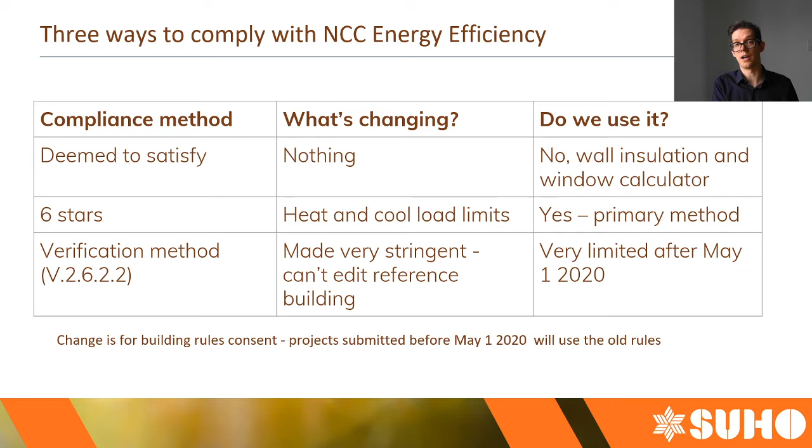Why is that so? Because the 6-star rating basically asks you to upgrade your design to get to a certain level, 6 stars. The verification method allows us to make a reference building, and we essentially try to make that reference building perform as bad as possible, because we have a lot of flexibility to change the window sizes and all that, so that our actual building has to simply be better than that reference building in order to comply. What does that actually mean? Well, in reality, it means that you can currently get houses that are otherwise 2 or 3 stars still through compliance with relative ease using that verification method, because of that flexibility in changing the reference building.

Is that a good thing? Probably not. So the government introduced this loophole to the 6 stars, and essentially a lot of the industry has become addicted to that loophole, and will have big troubles now that the loophole is essentially being filled up again and taken out. It's still there, but we can no longer actually change the reference building. So that reference building is set and has certain values and certain features to it, such as a 2.4 meter high ceiling. If the home you're building or have designed has higher ceilings than that, you're already getting into trouble straight away.

So essentially where you were kind of comparing apples to apples in the verification method, now you might have a pineapple that you have to compare to an apple, which is going to be pretty much impossible practically, or the specifications that you need to be better than your reference building are going to be so high that it's simply impossible to use.

So in practice, that means that come May 1, 2020, all of the houses are going to be using that 6 stars method. Now, people in Victoria and New South Wales will be very used to that 6-star system. That's where they have been using it predominantly in Australia. But now that's going to be a pretty level playing field across the country. Everybody's going to go to 6 stars, except for Queensland and the Northern Territory. So Queensland is still staying with the old code, 2009, I believe, at this moment.

However, even for those markets that are already used to the 6-star rating system, such as Victoria and New South Wales, there is a little extra criteria that has been introduced, which are the heating and cooling loads. So in addition to the 6 stars, you now need to meet a certain limit of heating and cooling load, a bandwidth, essentially. And what that means is, you probably need to know what a 6-star means. A 6-star essentially means nothing else but the combined sum of the heating and the cooling load together. So megajoules per square meter per annum. So that combined gives you a certain number, and that gives you a certain star rating.

What that meant is that you could potentially have homes that were very heating or very cooling dominant, and still together summed up to be a 6-star home. That's what the government wants to avoid, because we're trying to reduce the amount of mechanical heating and cooling that we need to pump into the houses. So depending on your climate zone, there's going to be different heating and cooling load limits, and as you can see on the screen, those can be quite different for different climate zones.

There's about 8 standard sort of climate zones that a lot of people know about in Australia. Victoria being predominantly 6, Adelaide being 5, and the hills in Adelaide being 6. But in NatHERS, the software that we use, those have been further narrowed down into over 65 different little climate zones, and every single one of those has their own heating and cooling load limits that we have to check in on. So good to know.

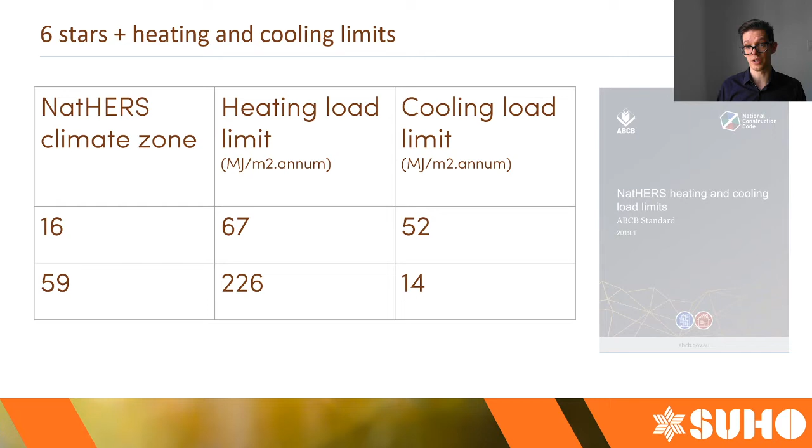So then when you need to get that 1 point or 2 point of stars, you still have to get quite creative in terms of upgrades in order to get there. So that's obviously something that we're trying to avoid. And the way we're trying to avoid it is by giving you guys some tips and tricks on what are the things that you need to be mindful of.

Now, don't take this the wrong way, but essentially what we're trying to do is beat a piece of software. Now, that software is a good software. It's pretty accurate in its simulations, but at the same time, the software obviously cannot cover every single type of design. It's going to have its flaws. It's going to have certain things that make sense. It's going to have things that don't make sense. So if we know what the software likes and doesn't like, we can prepare for that, and we can manage the expectations of our clients in the process.

We're just telling you, okay, if that's the case, then you need to tell your client you're probably going to have to offset somewhere else, meaning probably higher specifications in your glazing and your walls if you want to have that. So anyone can have anything they like if they're willing to make sure that they have the right specifications to do so. So a few other tips that the software likes: separating the habitable and non-habitable spaces with doors always works well. The eave depth and shading devices have a big impact, especially external shading.

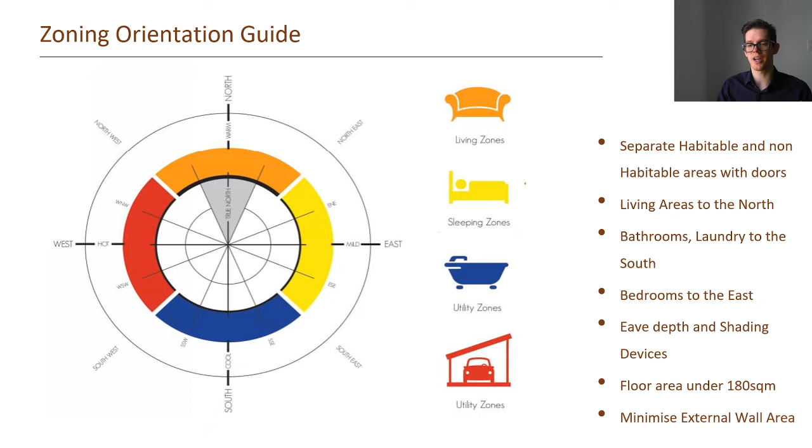Also, minimizing the external wall area. It's another good example. And when I say minimize external wall area, I'm talking about those walls that go with all the little nooks and all the crannies. The more we do that, the software just doesn't like it. So we're trying to minimize that external wall area by keeping it as straightforward as possible. Again, it might not always be possible, but where you can, try to keep these things that we've got on the screen in mind.

An example. Always like to bring in examples because it makes it a little bit tangible for everyone that's watching. So this is a multi-story, decent sized home. It's a new build and it's 3 stories. Now, the 2 things I would like to do with this example is not only to give you an idea about how this is sitting under the old code and the new code, but also to give you a glimpse into SUHO's reality. What happens when you send us through a plan? We actually take the plan and we model up the floor plan straight into a piece of software called First Rate 5.

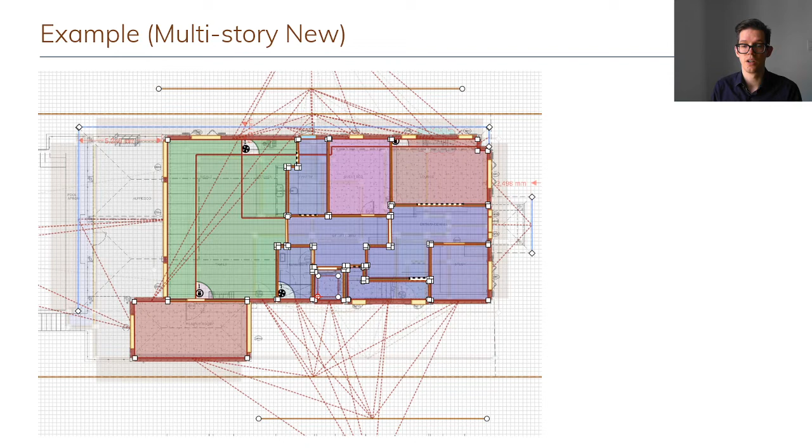And all the different areas in the house get a different label attached to them to determine the type of activity in that room, when people typically occupy it, and what type of activities they do. So gray, for instance, would be an uninhabitable space. That's the garage in here. Green might be your living and kitchen area, and you've got your bedrooms and so forth. So everything gets their own little label attached to it. And what label something has is important.

So that's also something that you need to be mindful of when you design something: what are the type of labels that you use, and are all the rooms that I have in mind already set after the build is completed? Might there still be some flexibility in terms of what you're going to do in that room? If you're not entirely sure, you might just want to stay away from already putting a name to it, because that might affect you negatively.

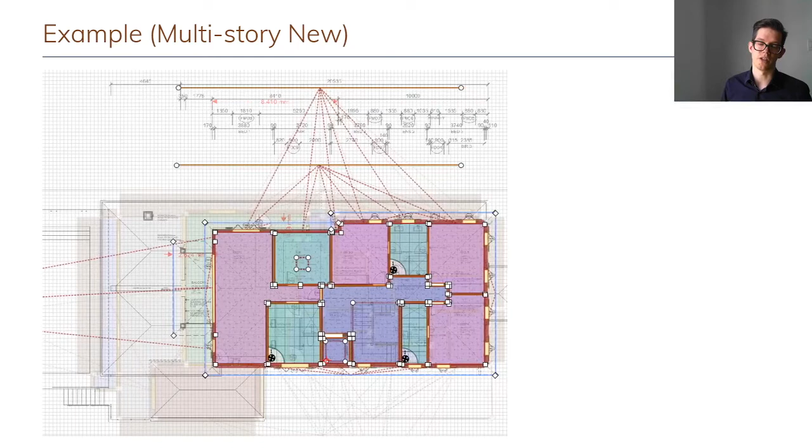Another thing that you need to keep in mind, in this particular design, it's a 3-story design. That means that we need to model every single house around it standard as 3 stories as well. That's mandatory, unless we get details from the architects, or we can find out on Google Maps that the neighboring houses are maybe double story or even single story. That's obviously going to affect how much shading we're getting from the surrounding houses. So the more details we can get, the better. So make sure that you provide as many details on your plans in terms of the surrounding houses as well.

Also let us know the manufacturers of the windows that you're looking to use. If you have it, we can already model that. If you know exactly what type of flooring you're going to use in the different rooms, let us know. Why? If you don't know, you can safely assume we need to consider worst case scenario, whereas maybe you don't need to if we knew that kind of detail. Under the NCC19, it's important to give the ESD consultants a lot more detail at the very early stage, as much as possible, so we can make the compliance model as accurate as possible to what actually is going to happen.

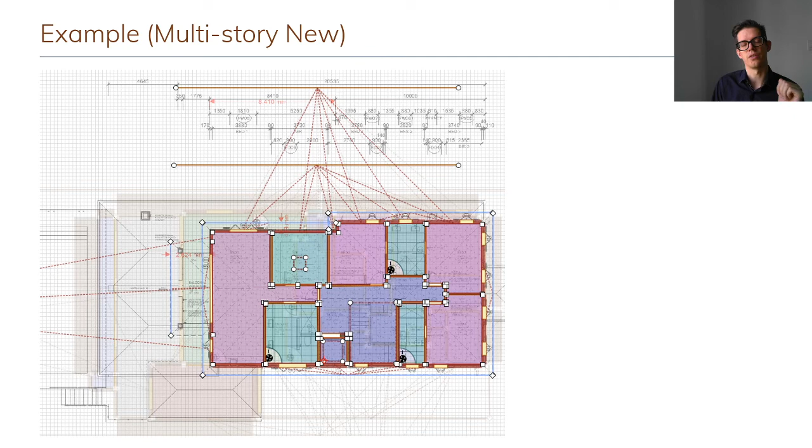Now, this design that you're looking at right now comfortably passed compliance, using the verification method that I spoke about before. So we didn't have to upgrade much on the specification that the client and the architect wanted to use. Everything was just fine. Now, what did we do? We modeled this under the NCC19 regulation. The initial star rating on it was just 2.7 stars. So bear with me, we're not even halfway to where we need to be. And our consultants then went into the design and started changing a lot of things about it, as you can see in all these bullet points. So we changed the glazing to really, really good double glazing.

We even changed the size of the windows, which people are not happy with usually. Bulk insulation to the internal walls. So really significant changes to the actual original design. And even with all that, we only managed to get it to 4.9 stars. So still a full star off the actual required 6 stars. Not to mention the heating and cooling load. I've not even taken that into consideration.

So obviously we don't want to scare anyone, but we definitely want to also make sure that everybody understands that, especially for larger designs, you cannot wait for building permit to go to your ESD consultant. It simply is not going to fly. There's risk of us having to go back to you, like with this design, we would have to go back to the client and say we need to change the design.

And what we really want to try and avoid for you guys is you making a design, showing it to the client, the client falls in love with the design, shows it off to all their family and friends, although that might have to happen digitally nowadays. That used to be the barbecue back then. But you know what I mean. They get excited about it. They love it. If you have to come back a few months later and say, listen, sorry, I can't get this through energy compliance, there's no way unless we use triple glazing, so we need to change the design. A surprised client is usually an unhappy client.

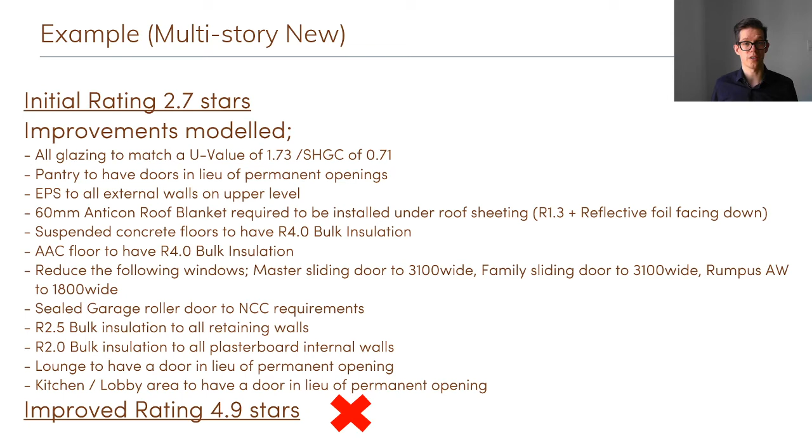But I know you get the idea from this example. What used to pass quite comfortably before might not pass that comfortably anymore. Anything that used single glazing before, you can safely assume you're not going to be able to get away with that moving forward. So here's a little summary of the standard design advice that we give people, just because, again, we want to make sure you understand what the software favors. You can deviate from that any way you like, but if you do, just make sure that you understand that there's some consequences to that.

So living areas to the north, that is always a big benefit. If you can manage that, that would be great. Obviously, 20 to 30% glaze to floor ratio would be ideal. That's what the software likes. So having floor to ceiling windows all around, it's going to be probably pretty tough to get that through compliance unless you're really using exceptionally good window specifications, which equals a lot of money.

Just basically try to keep these kind of tips in mind when you're designing. I've not put these tips in so I can run through all of them, because you guys can read perfectly fine. Just know that you can always rewatch this webinar on our YouTube if you want to comfortably run through some of the slides and read some of the things that are on it.

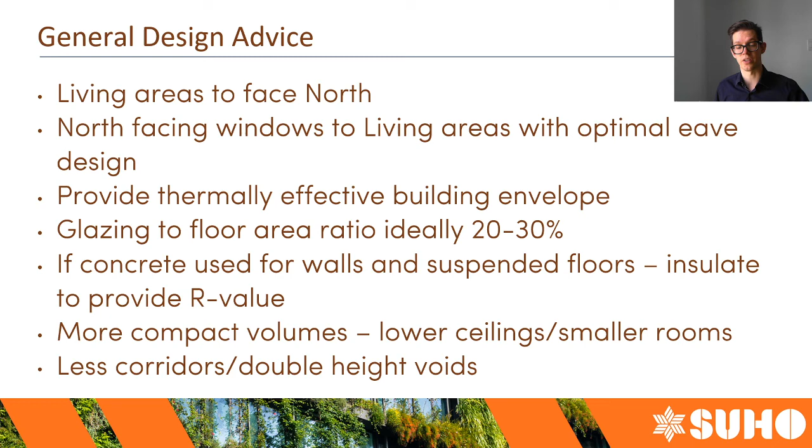We have prepared a special piece of software. Our software development team has taken our 60,000 plus ratings that we've done historically and developed an artificial intelligence algorithm that is going to allow us to predict a star rating with a very minimum amount of information. So your ceiling insulation, your roof colors, your type of wall construction, window orientation, some square meters on your windows. So in a matter of 10 minutes, we can get an understanding for you about where your current star rating is.

This software is already at a 0.3 accuracy at the moment, and it's going to allow you to get at least close to 6 stars before you start looking at compliance and all that. So this is a very unique piece of software developed by the SUHO software development team, but we've split it up into its own startup, Hubble, that is going to run separately from SUHO.

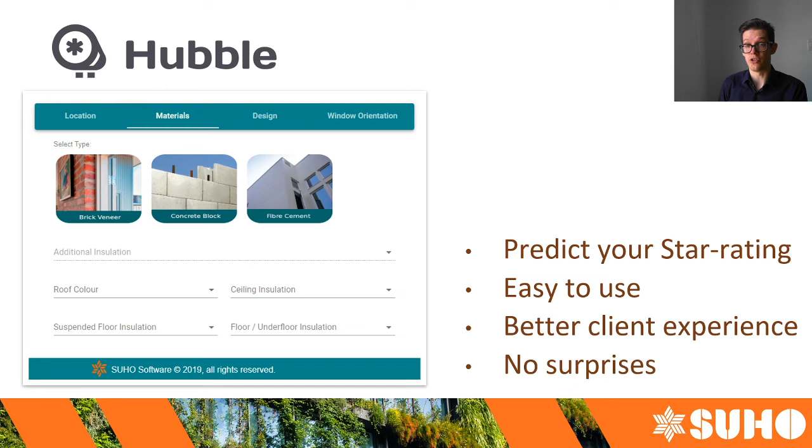So that's a really exciting webinar that I can definitely recommend to you guys to watch on Tuesday, because this is definitely going to be the future of energy ratings moving forward. It's going to change the market around completely. So really exciting stuff, and something that we're looking forward to use under the NCC19 code as well to help our clients.

So that was it for the content side of this webinar. Pretty straightforward, I hope. I hope it was informative and that this gives you a rough idea about what's going to happen and what are the tips and tricks that you can use in order to prevent surprises down the track.